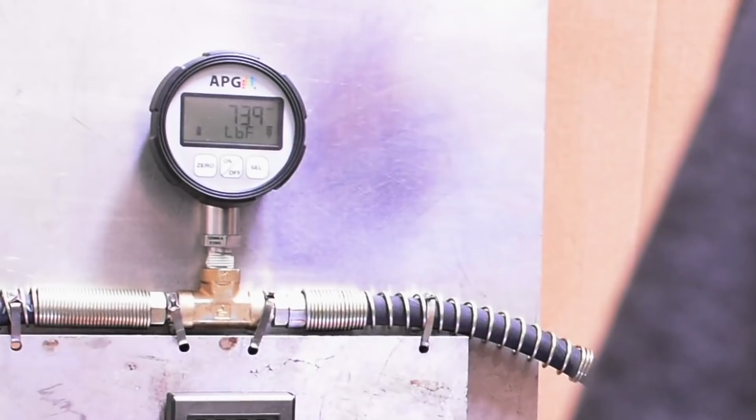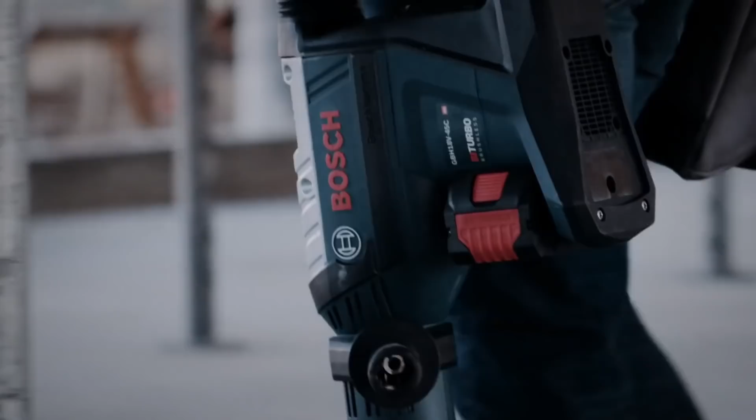This is the new Bosch Biturbo PROFACTOR, which is the latest high torque cordless on the market and came out within the last week. Bosch has been pumping up the PROFACTOR name with all types of marketing this past year, but this is our first chance on the channel to dive into any of it and see if it's all a load of marketing malarkey or if there's actually some beans behind the blabbering.

While this tool is all new to us and likely you, its specs are a bit familiar. The GDS18V-740N claims 740 foot-pounds fastening and 1180 foot-pounds breakaway. That should sound familiar to you because on our last high torque video, only a week ago, we tested Makita, which also advertises 740 and 1180. Quite the coincidence, but if those numbers seem oddly specific, they are basically 1000 newton meters and 1600 newton meters converted to foot-pounds. And these are not US-based companies, so that makes some sense.

That coincidence gives us the opportunity to see if it matches the power of that Makita, given the specs are besties, and we'll also be comparing the new PROFACTOR's torque output against the Flex, because that's the most recent high torque before this debuted, and the M18 Milwaukee, because it's still ranked number 1 cordless as far as we're concerned, and number 3 overall on our rank list.

One ace the PROFACTOR has up its sleeve in standing up to these names, and heck, let's just call it what it is, Bosch be straight cheatin', is the fact that according to them, this tool is only compatible with their 8 amp hour and 12 amp hour quote-unquote PROFACTOR batteries. Nothing else is listed. According to Bosch, PROFACTOR models such as this one are specifically optimized with in-tool electronics to take advantage of the 8 amp hour and 12 amp hour PROFACTOR batteries specifically.

And since on this channel we traditionally only test our main matchups with what's provided in the brand's kits, and this tool isn't sold in any kit, but is only pictured by Bosch with this 8 amp hour battery and listed as compatible with only the 8 and 12, we bought this pricey 8 amp hour pack, which, if you're not familiar with Bosch's batteries, uses the special sauce 21700 cell size, like the rest of their core packs, which makes this essentially an M18 XC 8.0 or a DeWalt XR 8 amp hour.

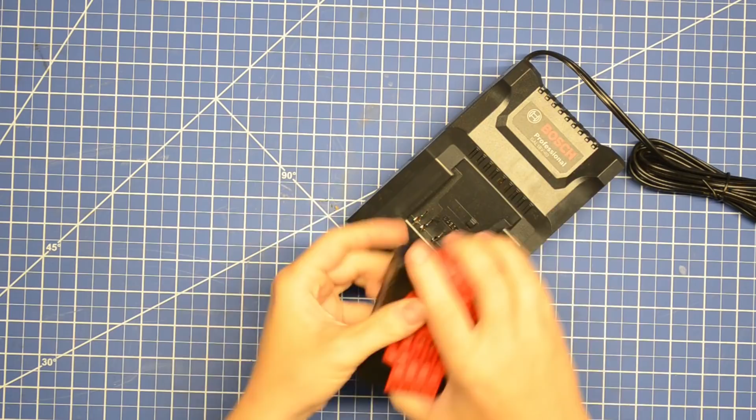Since we can already feel the comment section fuming about this turn of events, we also purchased Bosch's standard core 4 amp hour pack, which is also 21700 cells. So kudos to them for making the standard batteries in those 21700s, something Kobalt XTR sort of does with their 4 amp hour packs, and Flex, who's made by the same company, really could have and maybe should have done out the gates. We'll be testing both of these battery types here, which feature these neat looking cooling fins, to get an idea of where they stack up against the competition.

Then at the end of this episode, we'll be ranking sort of both versions on our rank chart and leaving it up to you guys which one stays. As a reminder, on this channel, we're all about testing versus the specs on the box. On the Hart episode, we used the battery they said was required to hit their numbers. And when sold in kits, we use what comes in the kit with the numbers on that box. And if Bosch claims their specs are only with an 8 amp hour battery, we gotta take a look and see, even if it seems like they found some wiggle room in our rule book.

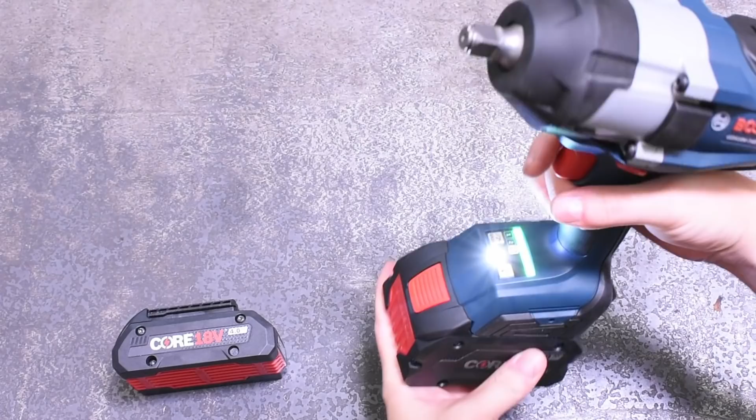With the 8 amp hour attached, the Bosch is definitely a tall one, but at 8.7 inches long, it's one of the shorter high torques we've tested and near the same as our Flex at 8.74 inches long. With that 8 amp hour attached, it also weighs more than the Flex too, but the same as a Harbor Freight, so we're not talking like super light here. We have a lot of testing to get into though, so instead of diving into what PROFACTOR or biturbo actually mean and other marketing jargon, let's get into it and see what it can do.

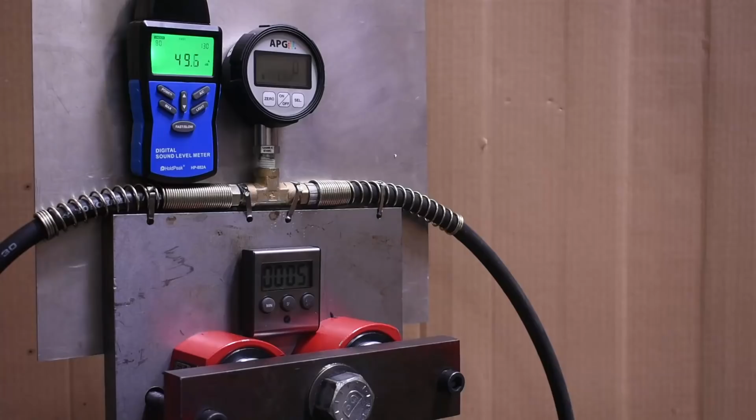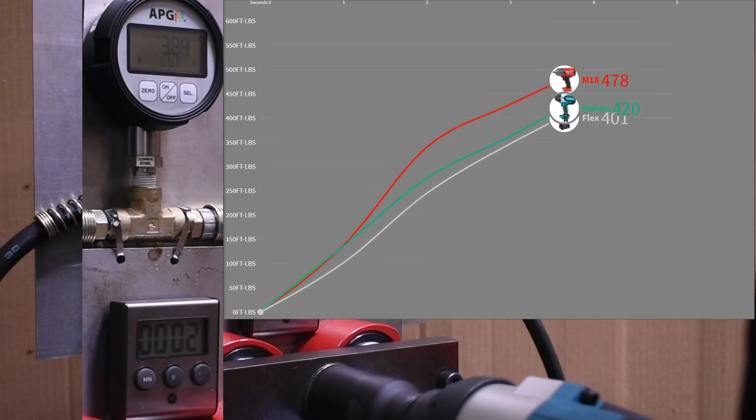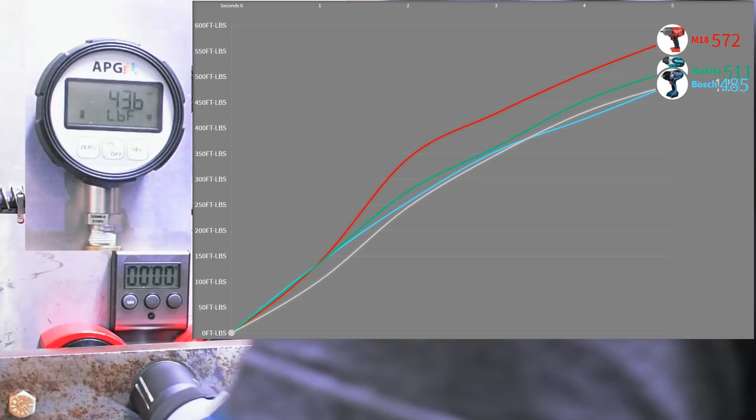Our first test is called working torque. This is 5 seconds in forward. Here's how M18, Makita, and Flex did. And here's a Bosch PROFACTOR with a standard 4 amp hour core battery, which they do not recommend. That's 1 foot-pound more than the Flex, so essentially a wash there, but both well behind the Makita and M18, which as we know hit super hard in forward.

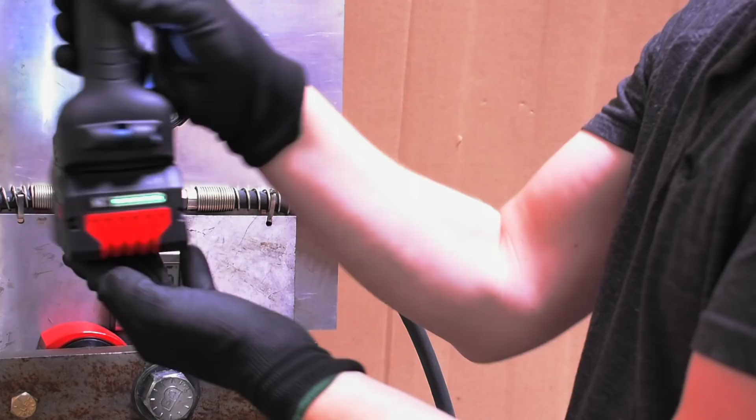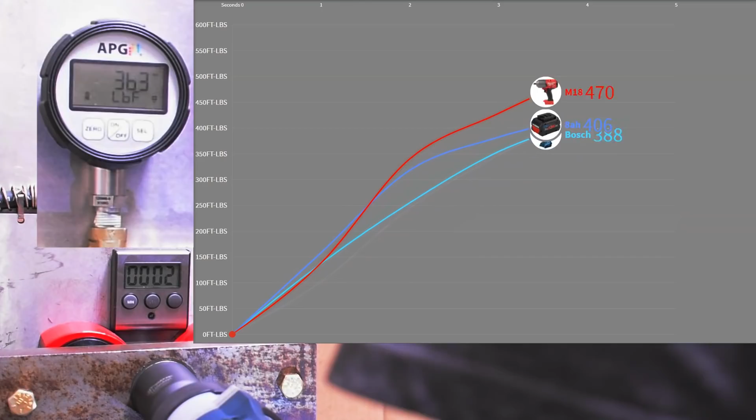Now here's the PROFACTOR using the 8 amp hour battery Bosch rates the tool with. So that's 406 versus 388. Some early gains on the curve from harder hits, but nothing to write home about in the end.

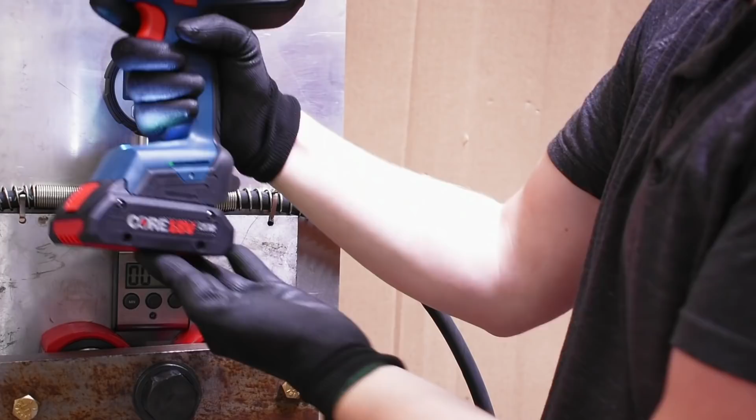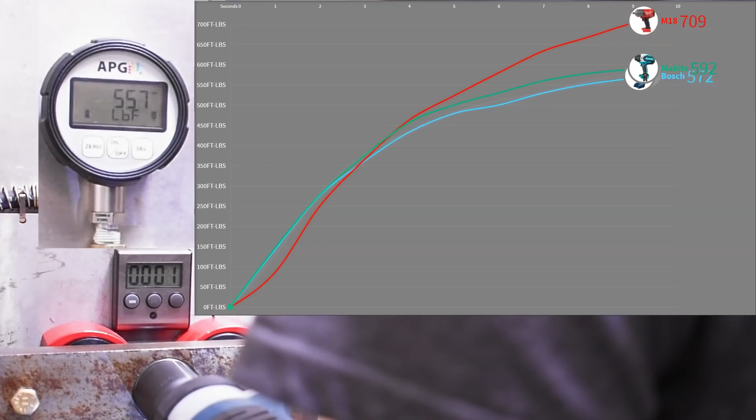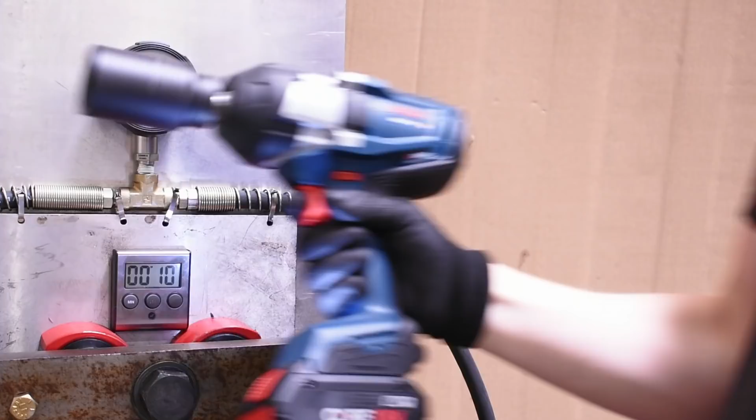Our next test is called max torque. It's 10 seconds in reverse. Here's the 4 amp hour core 18 volt versus the rest of the impacts on screen. So that's 588 covering up the Flex's run here because it made the same 588 exactly. So far the two tools with these batteries are interchangeable down to the foot-pound. Let's see if these longer tests with the 8 amp hour battery is able to supply that extra punch Bosch advertises the PROFACTOR tools are so customized for.

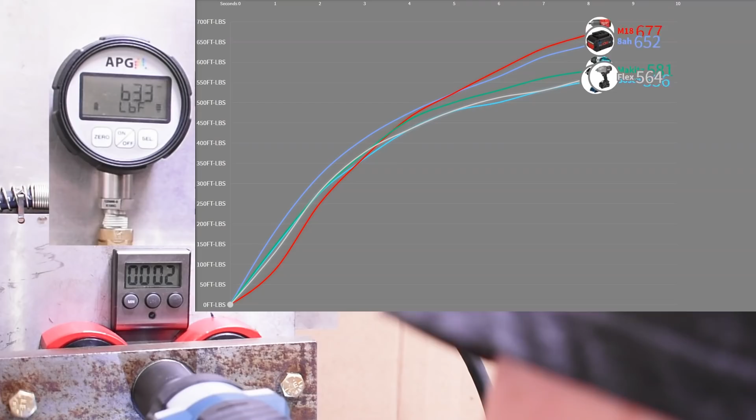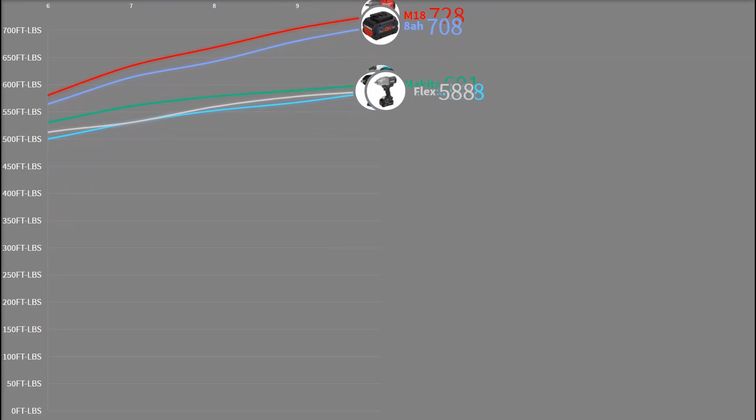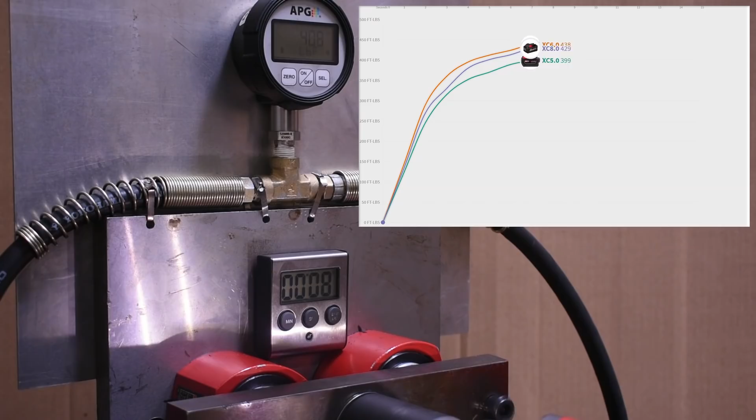Well, yeah, I'd say so. The 8 amp hour battery took this tool from a Flex to nearly an M18 in this test. And in the first 5 seconds or so, the PROFACTOR actually shows some gains on that Milwaukee, indicating it's hitting harder per blow. That difference of 17% is much more than the gains we saw in episode 18 with high output batteries, seeing really good gaps on the curve as well, but more like a 6% total increase. And this curve isn't flattening out either. It's ready to make more power.

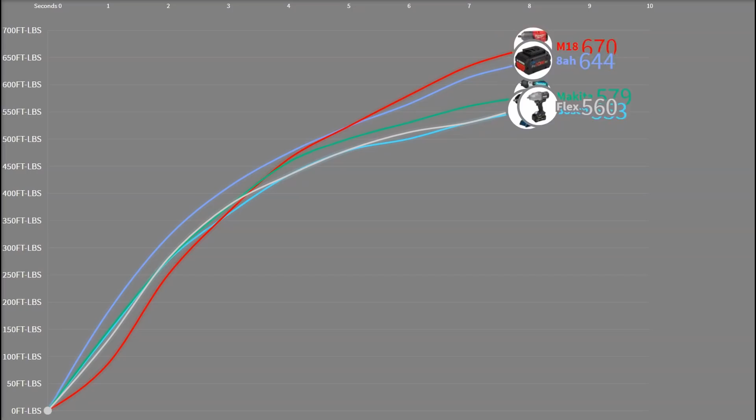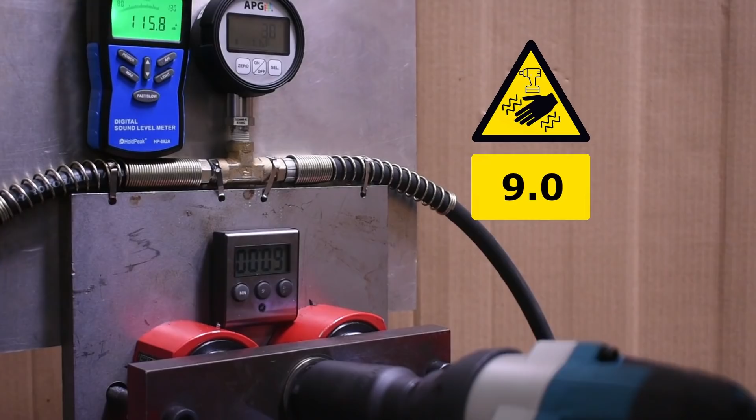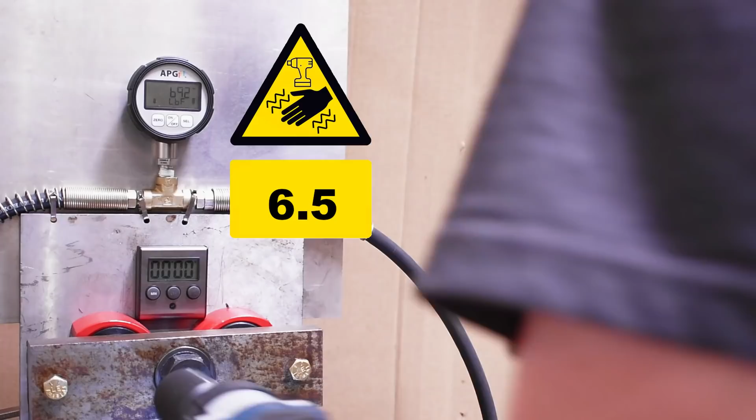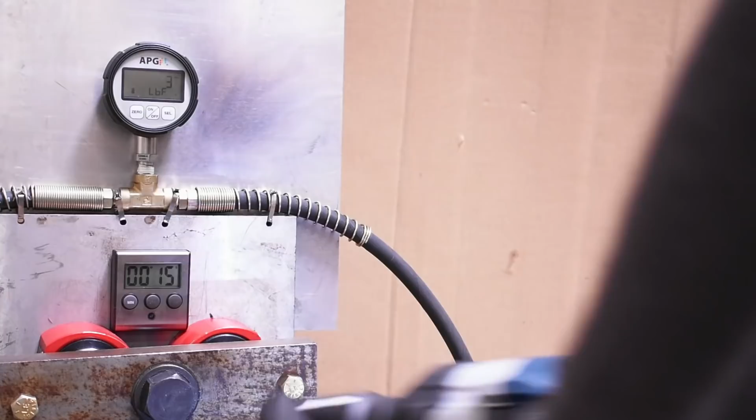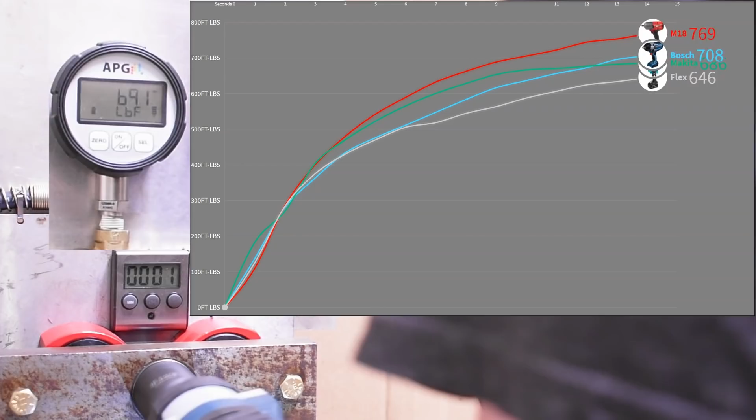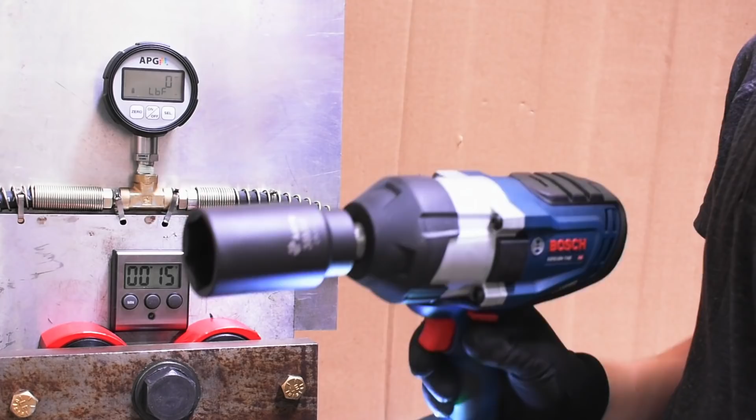So let's see the super tightened bolt on our third test called best case scenario. 15 seconds in reverse this time, battery's fresh off the charger. Here's a 4 amp hour core battery from the PROFACTOR. In a BCS test, the Bosch definitely shines, making the second most torque we've ever gotten out of a cordless with a battery Bosch says is not compatible with the tool, putting some gap but taking a while to do so even on the Makita here. Now let's check out the 8 amp hour Bosch says is the bare minimum for this tool in its best case scenario test.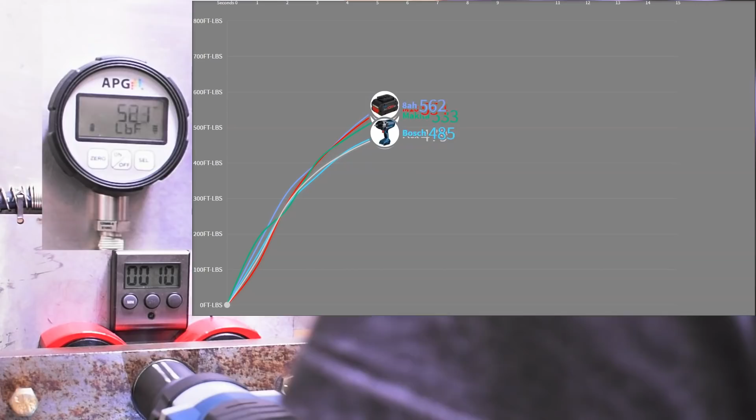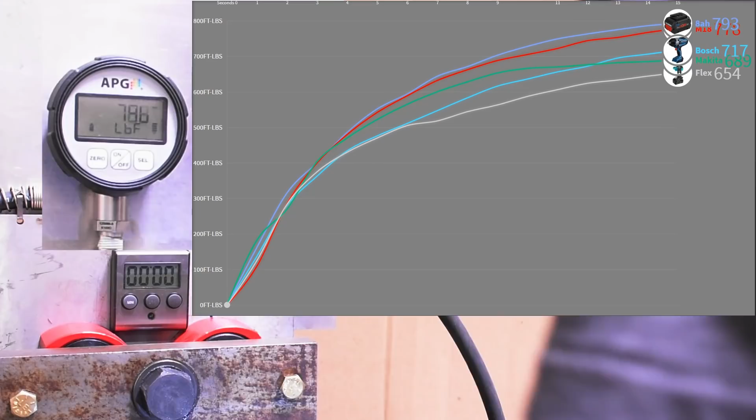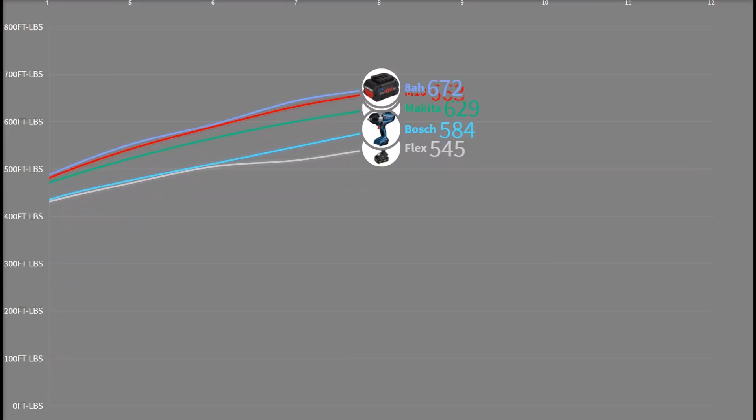Wowza, a cordless tool finally actually toppling the M18 for the first time on any test on this channel. That's 793 versus 778. Super similar power curves as well. And if you're saying that's not fair, the Bosch is basically using a double stack high output, you're not completely wrong, but we've long felt Milwaukee should be packaging the 2767 with an XC 6.0 if they want to get closer to their sky high specs.

Here we have a tool advertising 1180 making a little bit more than a tool that advertises 1,400. But if you're curious, we do have a run with the M18 high torque and a high output battery, so this is how that stacks up. This is the 2767 with an HD 12.0 battery. When we borrowed this high torque, we didn't own the other high output batteries quite yet.

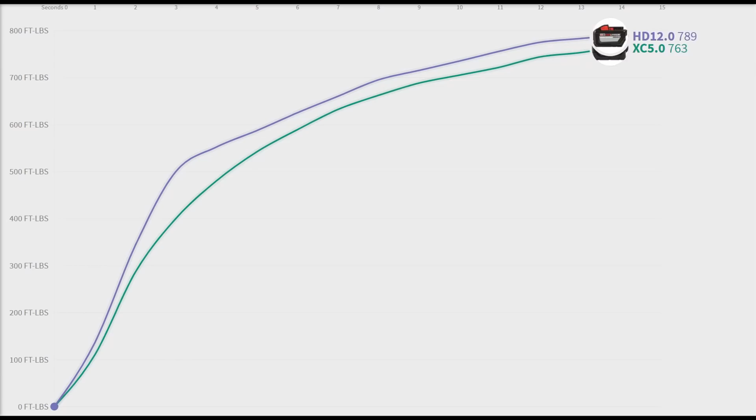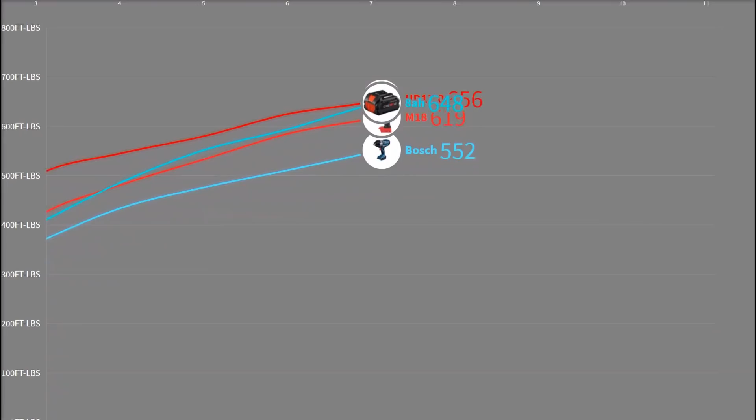So the Milwaukee is able to put 8 foot-pounds on the PROFACTOR with that 12 amp hour triple stack $250 21700 cell battery. But considering how much this Bosch picked up going from the 4 amp hour to 8 amp hour compared to the effect it has on Milwaukee, we're actually willing to buy the load of marketing speak Bosch is putting out about this tool.

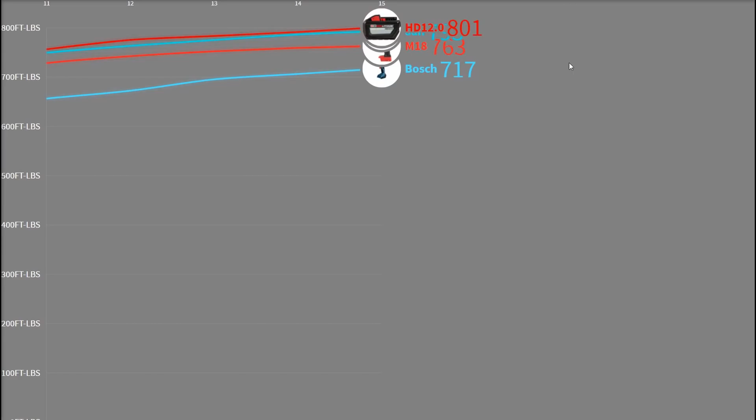It may actually be tailored to their 8 amp hour and 12 amp hour batteries, which maybe Milwaukee didn't really have an opportunity to do because this 2767 is quite some years old before high output was really a thing, which makes us definitely want to try out this Bosch with a 12 amp hour battery.

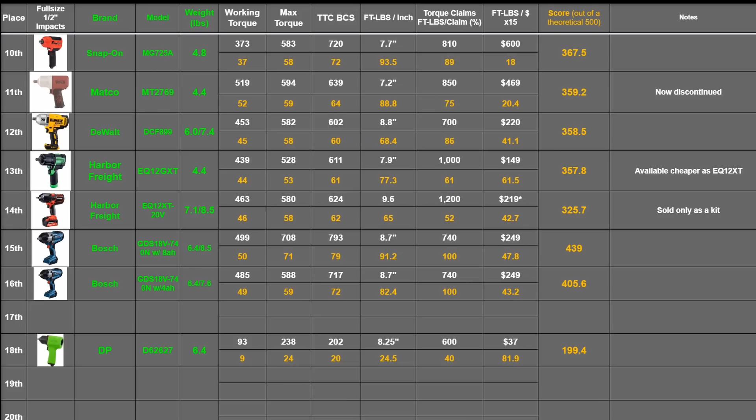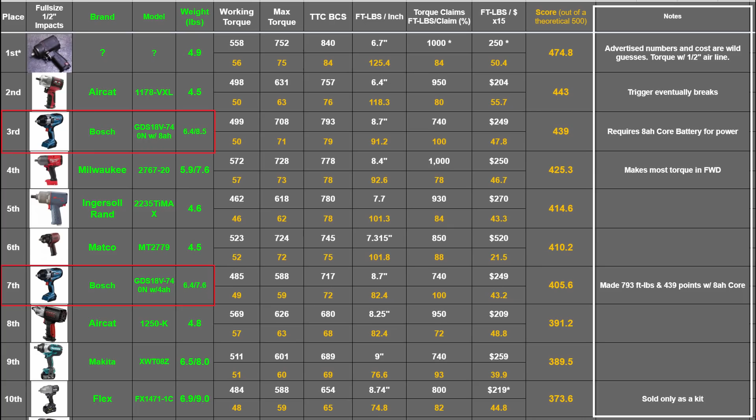That totals a huge 439 and 405.6, currently placing this tool into third place, knocking down the reigning champ Milwaukee, or it could put it in what would be otherwise sixth place, right below the Matco Monster Gun. On future episodes, it will only be listed once here, with a note about its other score in this column. You guys decide which version stays below. Either way, this is either currently the first or second highest scoring cordless we've tested to date.

It's worth mentioning that for the 4 amp hour battery we bought, it's a Bosch starter kit that comes with a charger. We'll put a part number in the description. These can be found for $70 to $100, making this tool kit not too bad considering you have to buy it piecemeal. And even with an 8 amp hour battery, since you don't need a PROFACTOR sticker on yours, you can just pick up any GDS18V-740N as we've shown today for around $90 to $100.

We have a few more high torques on our list before this series is wrapped up, unless there are new introductions to the market like Ryobi's.